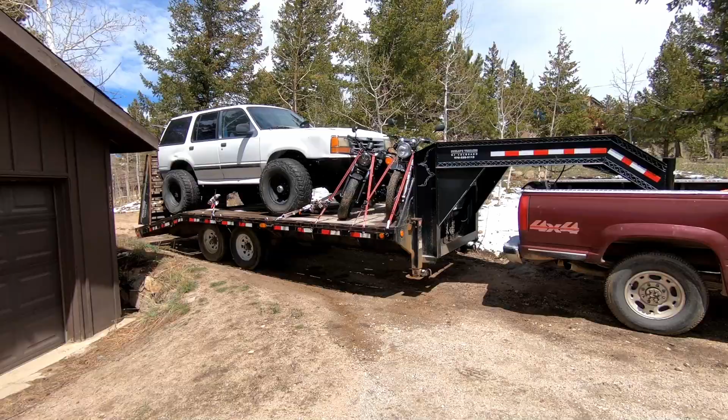All right, I'm estimating 13,000 pounds. Do we think we're gonna make it? It is all downhill, which should make it a little easier. Let's find out. We got lots of very hilly dirt roads to get where we're going. Slow speeds. Someone recommended that I kick it into 4 low for doing stuff like this. So I put it in 4 low and it's actually making a big difference. So thank you to whoever made that comment.

Has plenty of torque with that 2.5 times gear reduction and keeps the RPM up, so we're staying nice and cool. The 4 low trick made sure that this thing didn't overheat while I was towing all this stuff across town. And I even found a broken down F-250 on the side of the road pulling a trailer, and it gave me enough torque to even pull him to safety. So I was towing my trailer, an F-250, and that guy's trailer. Does that count as pulling triples?

The truck did its job and I got everything moved over, but I do need to be able to tow in 2 high and not just in 4 low, so I do need to actually fix this overheating problem. Also, it was a problem that just kept getting worse. Originally, it would only overheat when I was towing, but it started overheating even when I was just driving around town. Especially if I was going uphill with the AC on, this truck would overheat. I had 3 weeks before a 1,300-mile road trip, so I needed this thing fixed.

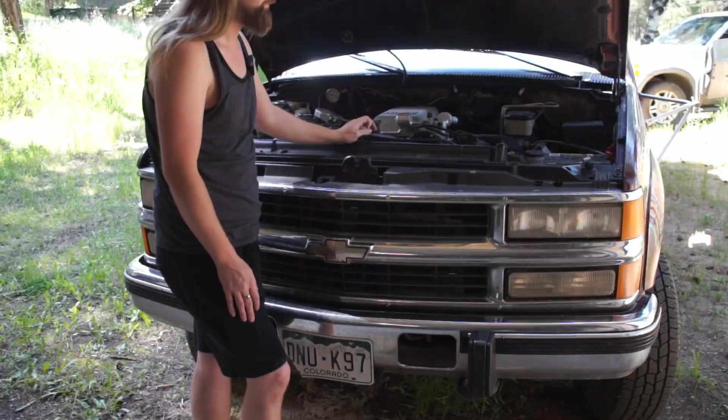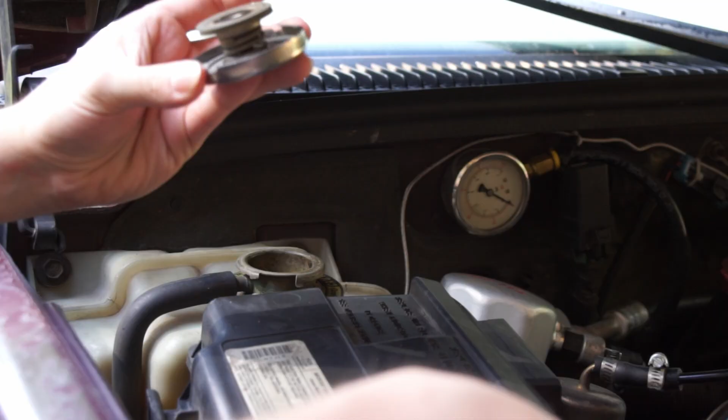The overheating on this thing's gotten so bad that I'm starting to get paranoid that it has a blown head gasket or something major. So first things first, let's check if there's oil in the coolant. I really don't know what I'm going to find down here. And if I find something bad, the whole course of this video is going to drastically change. I do have coolant inside of here. Looks relatively clean. Do not see any oily films on the top of it. It's a very good first sign, no oily film on the top. Now let's start it and see if there's any pressure coming out of the coolant system.

Nothing obvious so far. Doesn't want to blow that rag off. Doesn't want to blow my hand off. Let's turn it to high idle, see what that does.

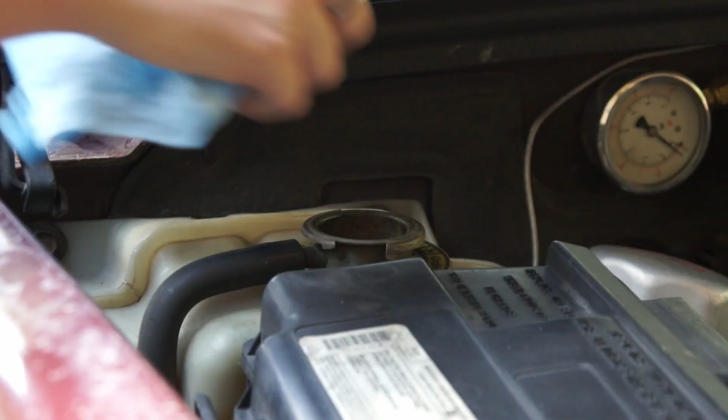All right, there were no obvious issues, no oil, no crazy blow-by. I'm gonna go through and inspect the cylinder heads, make sure there's no crazy leaks or anything, but as far as I'm concerned, that means there's probably not a head gasket issue. I can move on with what I was gonna do to this truck to fix the coolant issue.

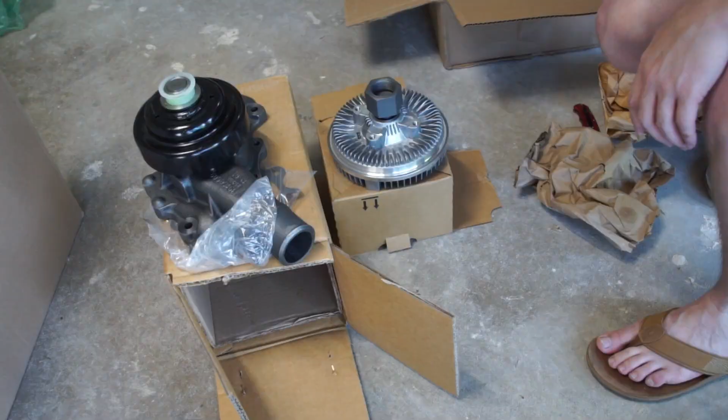All right, here's the parts I'm gonna use to fix this thing, and basically, none of these are for a 6.5 Detroit, which is the engine I have. Instead, most of these are for a Duramax. Duramax parts are a great upgrade for the 6.5 Detroits because GM's learned some stuff over the years as they continue to design these things. Sorry, just noticed I forgot to open the fan.

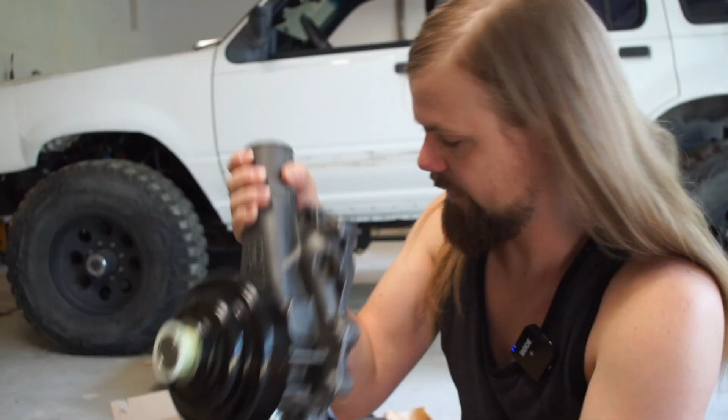The one part that's going to be controversial is this water pump here. The reason that this water pump is controversial is because it makes a whole lot more flow than the stock pump. There's lots of people on the internet that are gonna tell you that if you increase flow too much in a heat exchanger, that you're actually going to reduce your cooling capacity.

And those people are wrong. It doesn't work that way in a closed circuit cooling system like this. It's virtually impossible to have too much flow to hurt your cooling capacity. Almost always, until you get into cavitation issues or crazy flow dynamics like that, more flow is more better. I was thinking about going on a 15-minute rant about this and telling you all the engineering behind it, but you just need to know more flow is more better.

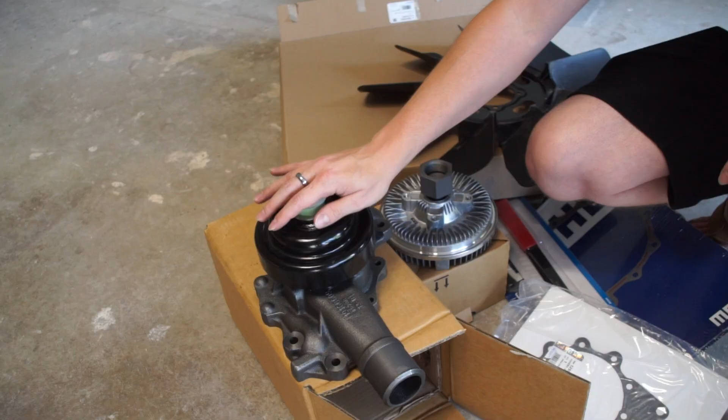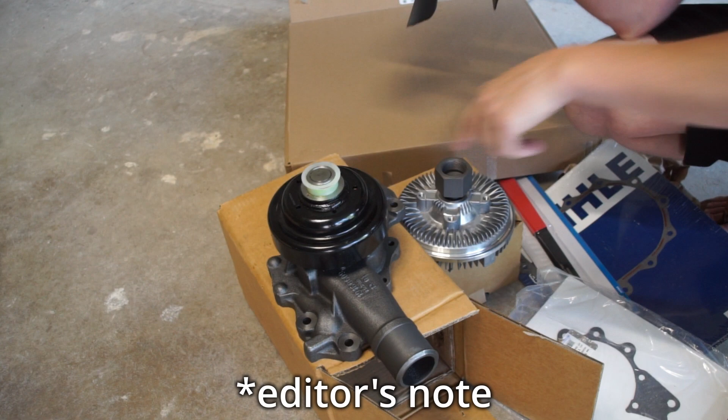So we got an upgraded pump that is better balanced, and it also provides more flow. We have a new fan clutch, and then we have a fan with more blades from a Duramax, because again, more flow is more better. That's true even for the air, not just for the coolant. Better for heat transfer, that is. It might be less efficient, might use more power, but it's better for heat transfer. These three upgraded components will not only replace outdated components on the truck that might be 20 years old and causing a problem, it'll also give me a lot more cooling capacity in general.

How am I gonna know that it's more cooling capacity? Well, it's gonna be really easy to test because the overheating issue is so bad on this thing that just driving up the steep grade to get home, if I don't take it steady at 15 miles an hour, this thing overheats every time. If I can go 25 or 30 on my way home in this thing when I'm done with this, I'm gonna consider it problem solved.

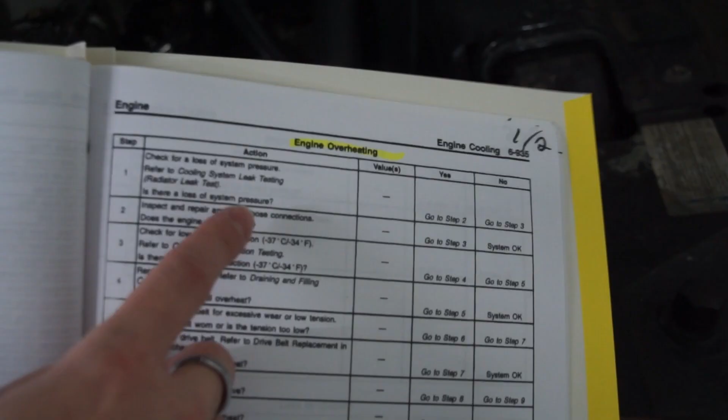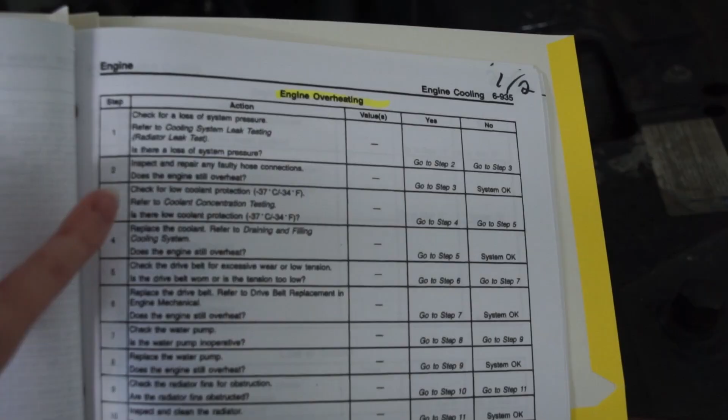All right, I'm always harping on this, but the first step when repairing anything is having good service info. Professional technicians don't repair anything without factory service info, and neither should you. Step one would be to come to the diagnostic tree that says engine overheating and go through all these steps. This will test easy things like make sure you actually have some glycol in your coolant, to test your thermostat and your water pump, and whatever's wrong with your overheating system, this will get you there.

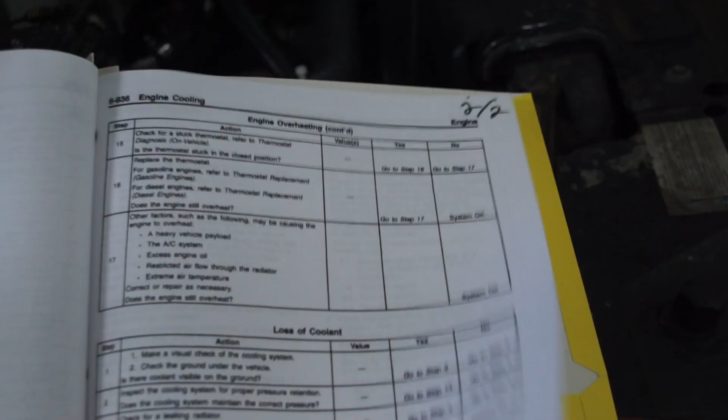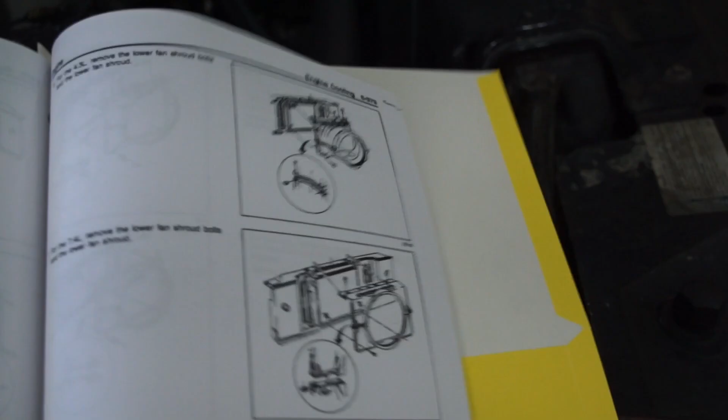And then not only that, it'll actually tell you how you're supposed to replace these things and give you a nice convenient little picture so you don't run into those situations where you forgot there was a fastener on the bottom and you forgot to undo it, or use the wrong sealant, or simple mistakes that mean that you have to do the job multiple times when you really shouldn't have had to. Always use factory service info.

That being said, I'm actually doing things completely backwards on this truck. I already bought all those upgraded Duramax parts way before the overheating issue got this bad. So I'm putting those parts in no matter what. Normally it's really expensive to just throw parts at a problem. You should actually have a solid diagnosis before you throw parts at things. But in this case, I wanted to upgrade the cooling system anyways, so I'm doing that either way. And as I take things apart, I will test them and make sure that what I'm replacing was actually the problem. Again, I'm doing it backwards, but we will go through the diagnostic tree as I pull this stuff apart. Do as I say, not as I do.

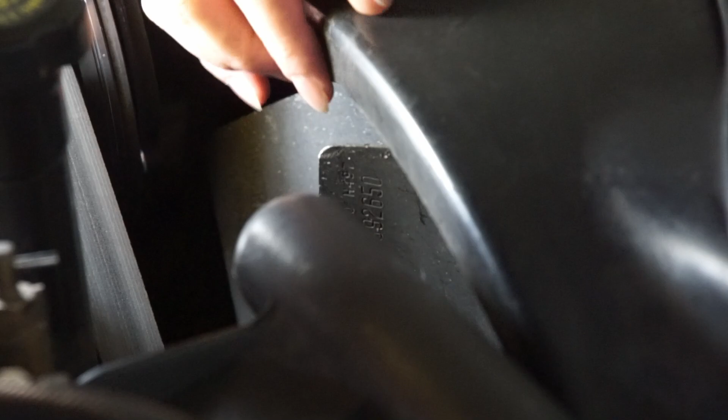In the spirit of actually diagnosing things, let's take a look at this fan. I already bought a fan clutch for this thing because I bought a Duramax fan and I need the fan clutch that goes along with it. But according to the factory service info, if I want to diagnose the fan clutch, one of the things I do is I spin this by hand, and if it goes 5 times around with no drag, then the fan clutch is bad.

Now, I don't know what no drag means. This is pretty loose, but I can certainly feel some drag. I'd say this passes, but unfortunately the service info isn't more specific, it just says no drag. There's a certain amount of wiggle that's allowed on this, and then the final test would be that you run the engine with the radiator blocked, and once the engine gets to a certain temperature, you should hear this fan clutch engage, and you use a thermometer to check and make sure that it engaged at the right temperature.

I'm not going to do any of that because I don't want to warm up the radiator before I pull it apart. That's just going to make it harder to work on, and I'm already going to replace the fan clutch. So again, do as I say, not as I do. I should go through all the diagnostic steps on this fan clutch before I replace it, but I'm not going to because I have an upgraded fan I'm putting on it either way, which means I need to put an upgraded fan clutch on. I'm going to start with removing the radiator.

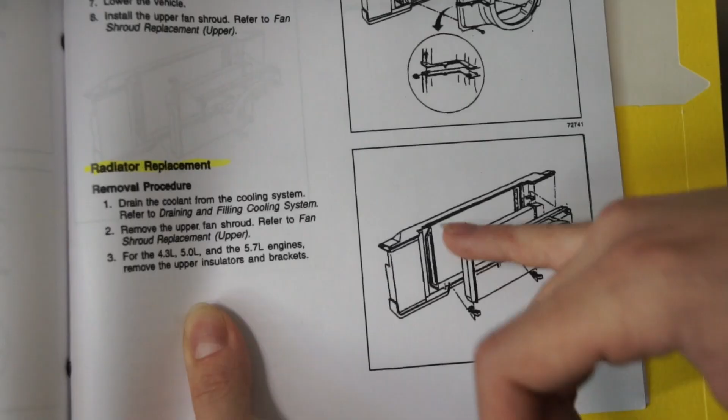I want to do this so I can clean out the radiator and also have easier access to the fan clutch and the water pump. So according to this, that means draining the coolant, removing the shrouds, pulling the radiator. Let's get to work.

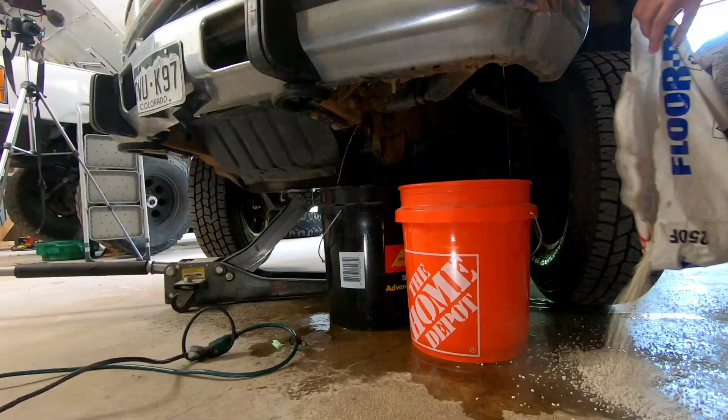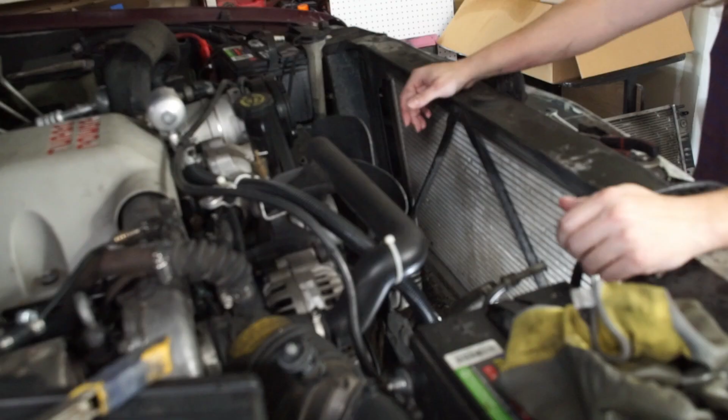All right, all the shrouds are out, radiator's out. I was gonna say that that was not the worst radiator removal I've ever done. It really wasn't that bad, except there was one hose clamp on the lower radiator hose that was just in an impossible location to access. I really should have taken the passenger wheel well out of this thing so that I could have reached that hose clamp. I fought with it like for an hour. It would have been faster just to pull the passenger wheel well, but I didn't, and so I ended up fighting with it for an hour.

I've started to hate working on V8 diesels because I feel like to get enough room to work on anything in this, I have to pull the wheel wells every single time. On an inline six, you don't have all your cylinder heads sticking out into your fenders, and so you can access stuff without having to pull the wheel wells. It's kind of a pain in the butt. Inline sixes are way easier to work on. Oh well. Got a V8 for now, this is what I've got. I'll stop complaining. Let's get back to work.

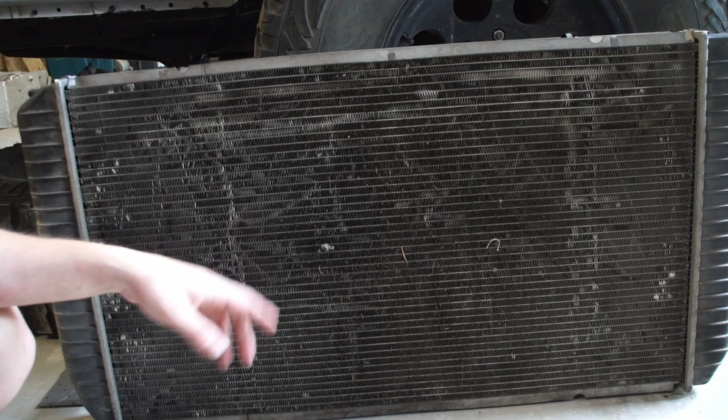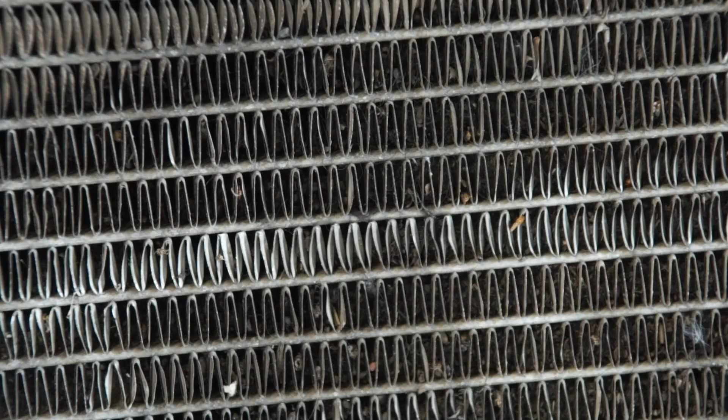From back here, this radiator doesn't look terrible, or at least in person it doesn't look that bad. On camera it actually looks worse than it does in person. But then when you zoom in, I'm not sure if it's gonna come across on camera, but there is like little tiny grit filling this thing all over the place. You probably can't tell, but I'm shining a light on the back of this, and most of the spots on the back, it's not even shining through. It's totally plugged. So let's rinse this radiator out. This might have been a big part of my problem.

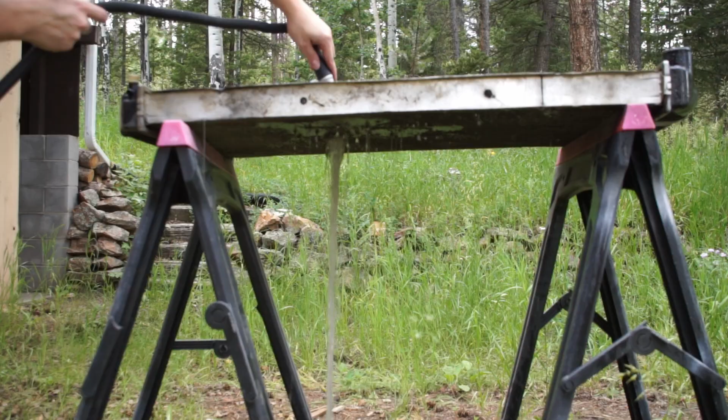See how brown that water is coming out? Mostly in the middle, the sides aren't so bad. Here's a look at what I mean when I say this radiator is plugged full of garbage. You see how between every single fin, there's just greasy, black, dirty nonsense? I don't know what all that is, but I'm having a really hard time just spraying it out. We'll see if I'm even able to get this thing clean.

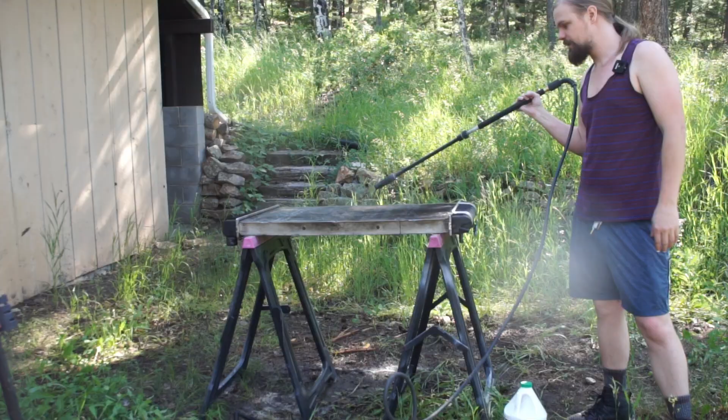All right, it's time to bring out the big guns. The hose is not doing it. I can't get all the crap out with the hose, so I'm bringing out the pressure washer. Normally you don't want to do this because you'll bend the fins if you use too much pressure and then it's screwed, but in the spirit of it's already screwed, I can't screw it any further, I'm gonna give this a try. If I can't get all this dirt out, I'm replacing this either way, so drastic times, drastic measures.

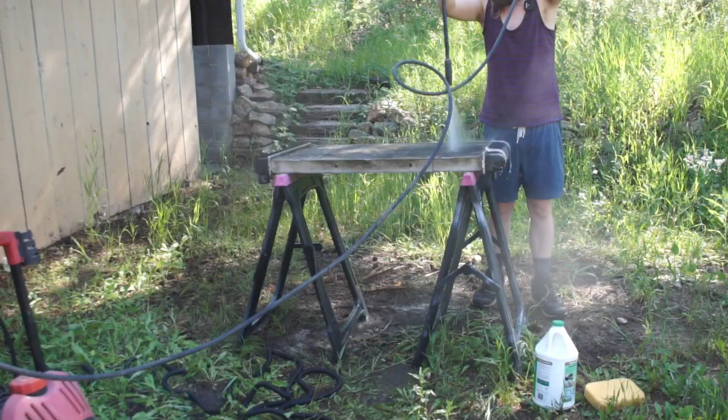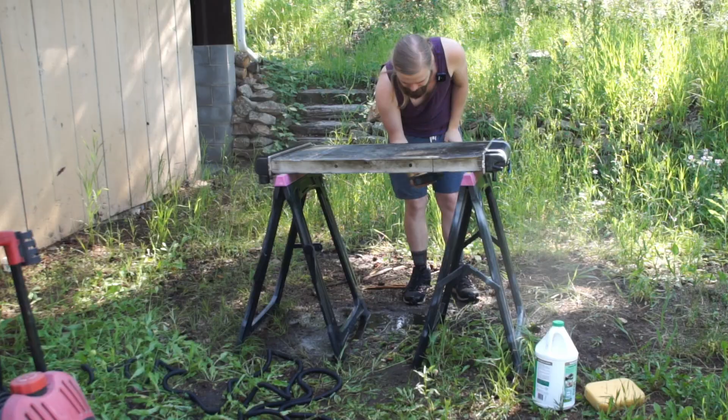Getting somewhere. It doesn't look like I'm bending fins yet, so let's keep trying that. So I'm pretty sure the radiator was my overheating problem because that thing was plugged full. On top of that, I was also having some issues with the AC, and if the radiator's plugged, no air can get through the AC condenser as well, so it all makes sense if the plugged radiator was my problem.

I think I got it clean enough that it'll work now, but if it doesn't work, I'll just have to buy a new radiator and replace it. For now, I'm hoping I got away without spending the money on that.

It's time to move on to doing the fan clutch and the water pump. These are the parts that are going to be upgraded to heavy-duty parts, so they should be better than stock. Between fixing the maintenance problem with the stock component and upgrading the other stock components with better aftermarket parts, hopefully I got this problem fixed. We'll see. Let's get back to work.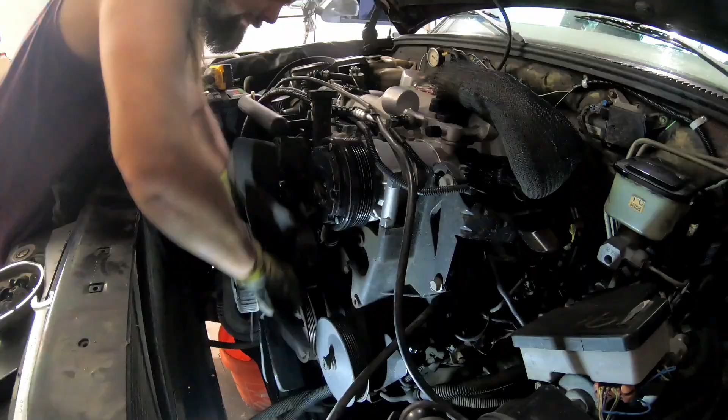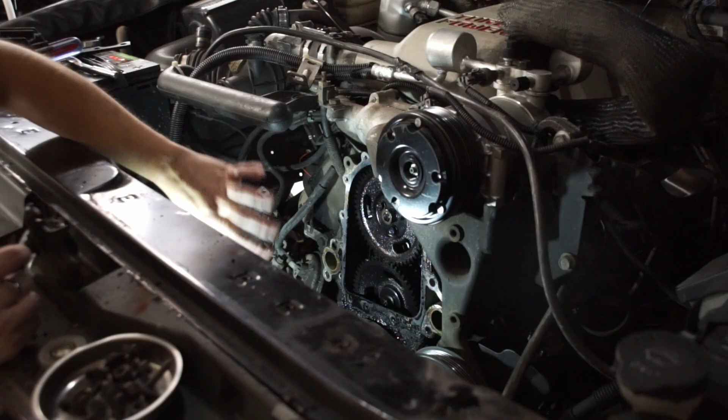There's the water pump off, and I actually had to remove quite a lot of stuff to get this to work. Basically, all of the accessories on this side had to go in order to get to this. One thing I noticed is it is very, very wet underneath this cover here. This was definitely leaking. So I don't know if that's an indication that the water pump was bad or if it was just the gasket behind it, but either way, there was service back here that was needed.

Hey, from here I can tell I got some leaky valve covers over there. Probably gonna ignore that problem.

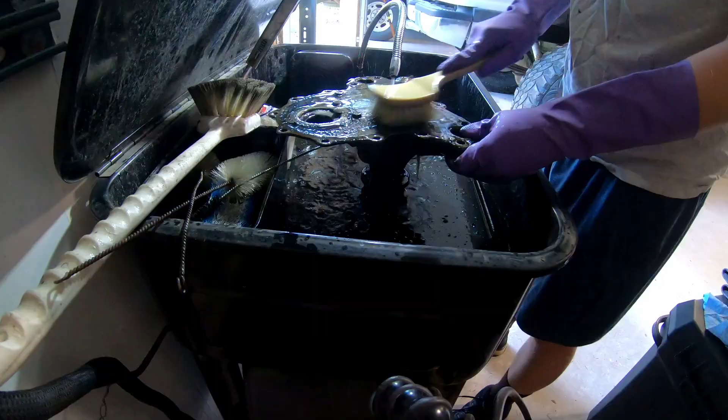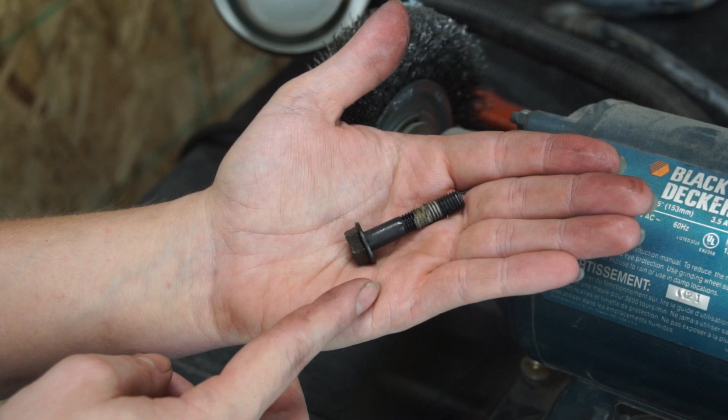So I've been cleaning up each of these water pump bolts, been running them through the parts cleaner, and then I've been scrubbing them off as best I can. Some might say this is pretty anal, but thread lock and sealants do not stick to dirty bolts. On top of that, dirty bolts have different torque specs than clean bolts.

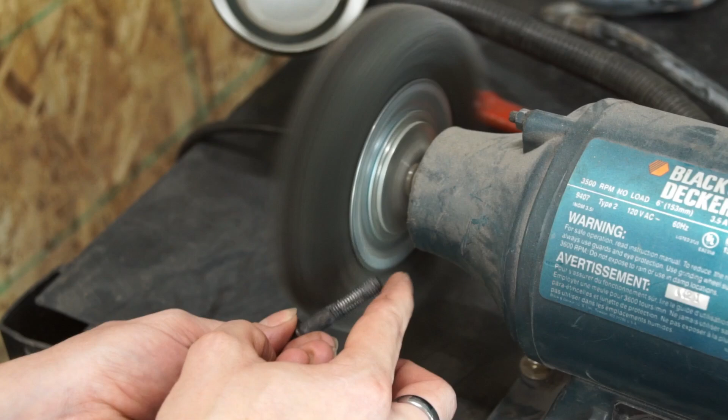So if you're putting something together that involves gasketed surfaces, and you don't want to have to get back in and redo that job because your torque spec was off or because it's leaking because your torque spec was off, it's a really good idea to clean up your bolts. It's a really easy thing to get wrong, and it's a really stupid reason to have to redo a job, so clean off your bolts. It'd be really nice to have an ultrasonic cleaner to do this for me.

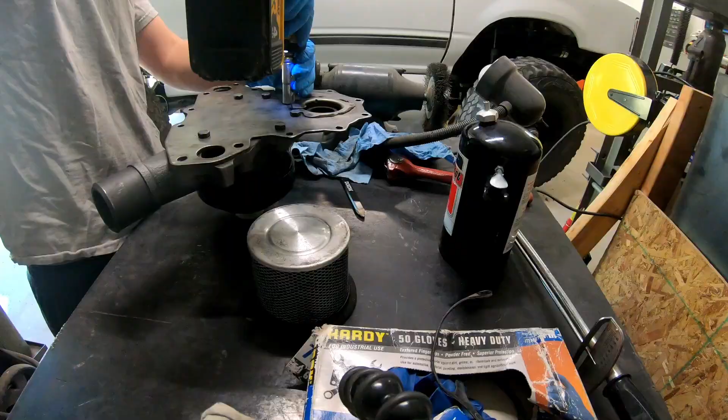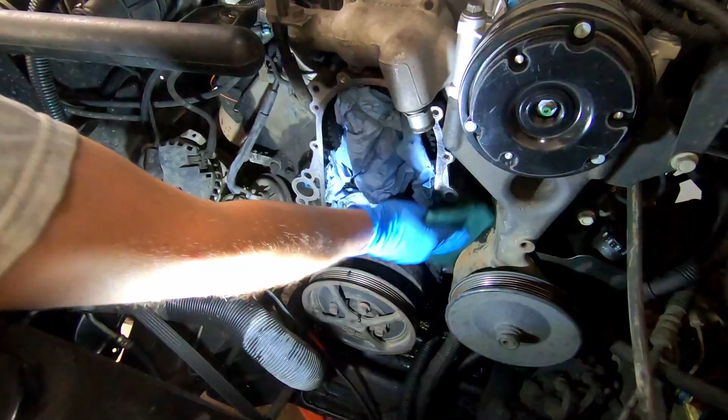All right, I got the water pump back on. It's on there and that's torqued. There's still a lot of stuff I need to reassemble to this engine, and one of the most annoying things in the world to me is you start assembling things, realize you forgot to put something on, and then you have to go back and remove all the stuff you just put on in order to put back on the thing you forgot. So I'm gonna show you a little trick to get away from that.

In safety critical industries, when they're working to procedure, one of the things that the operators do is what's called a circle slash technique. What you do is the step that you're on, you circle. That's how you know what step you're on. You work the step, and once that step's complete, you add a slash, and then you circle the next step that you've started. This tells you, have I started this step? If there's a circle, I have. Have I finished that step? If there's a slash, I have.

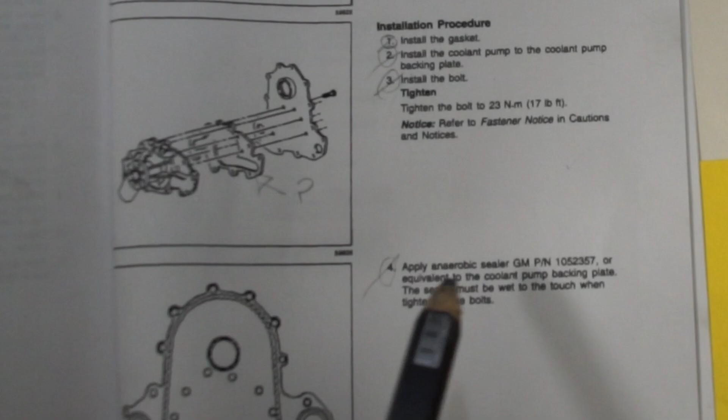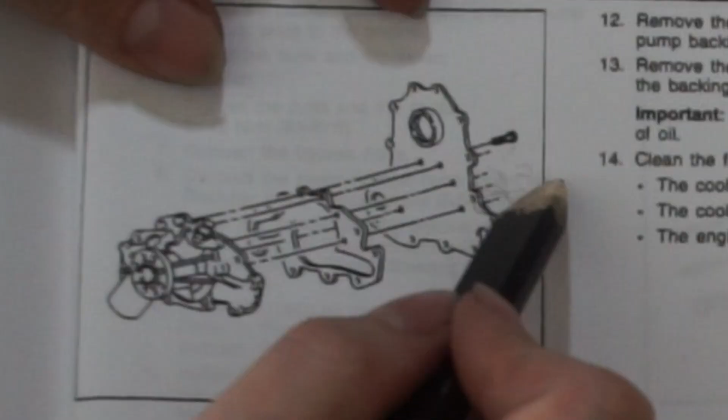It makes it really hard to miss things because it'd be very obvious. I look back over this sheet and I see all the parts of the installation procedure I clearly did because I circled and slashed them, including the tighten steps. You could take this even a step further and circle slash your fasteners or add your torque spec number on the fastener as you go, but I'm not gonna get that anal with it.

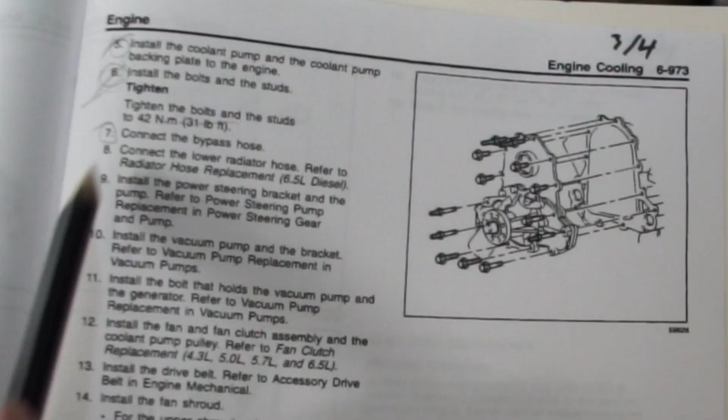This might seem like a lot of work, but slow is steady and steady's fast. So it's better to take your time with this stuff. If you skip something, it'll take you twice as long to go back and redo it than it would have to just be anal about your steps in the first place. Back to work. Got a bunch of hoses and things to connect.

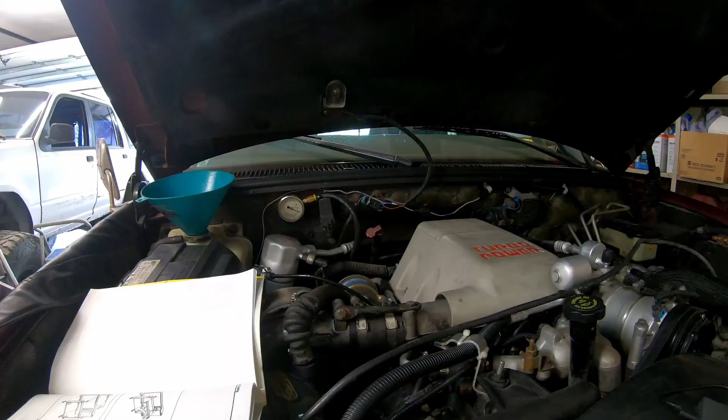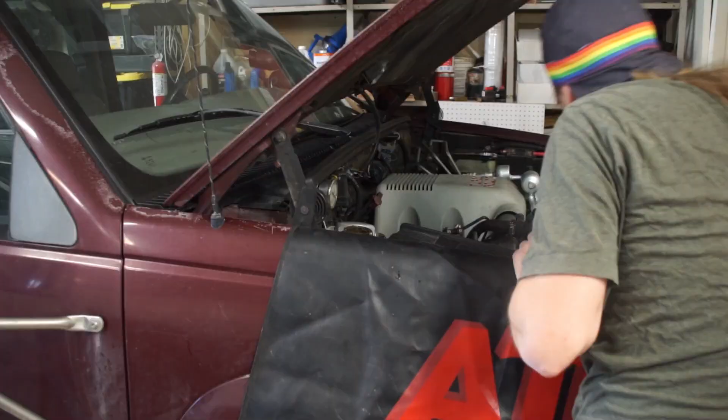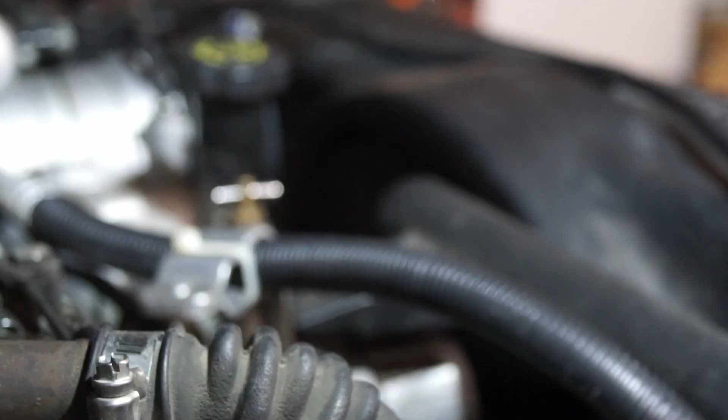It's running great. I'm waiting for it to warm up so the thermostat will open and then I can check the coolant level. It doesn't seem like the fan is running into the shroud anywhere, which is really good news. I haven't seen any leaks anywhere yet. Let's get this thing bled and see if we managed to fix this.

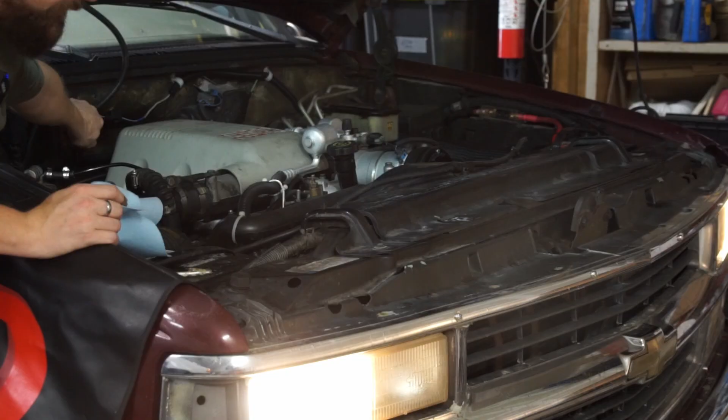The last thing I need to do is refill the transmission fluid. The radiator has a transmission cooler in it, so I lost a decent amount of tranny fluid when I did the radiator.

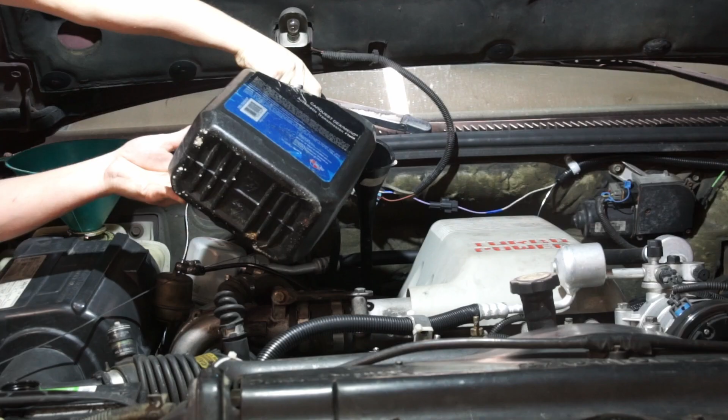Really, I should probably do a full flush, but I'm not gonna. All right, everything seems to be working, which is great news. You never know when you do a big job like that if there's gonna be some stupid thing you missed. Following service procedures helps with that, but you still never know. I don't see any leaks. I don't see any issues.

So far it's not rubbing on the fan shroud, but time will tell. I'm gonna have to drive it around a little bit and check the fan shroud, make sure it wasn't rubbing, check the trans fluid, make sure it's topped off, check the coolant, all the normal good stuff. There is still one issue with this I wanna fix though. It's a pretty serious issue actually, but I'm hoping the fix will be simple.

What I have you staring at right now is where the steering shaft enters the steering gearbox, and the gearbox isn't moving and neither are the tires. That is how much I can move that shaft without moving the tires whatsoever. This is how much the steering wheel moves before it moves the tires, which means the whole time I'm driving down the road, it's like a Mickey Mouse cartoon. This thing's wiggling back and forth like that. There's a lot of slop in the steering gearbox.

Now, personally, every single car I've ever driven was a jalopy that had clapped out power steering, and I've never driven a Chevy with tight steering. So I didn't even notice this at first until my partner drove it, and then she went, "This is dangerous, you need to fix this." And then I drove it a little more and I went, yeah, you're right. This is crazy. I better fix this. So I'm really hoping that just adjusting the lash on the steering gearbox is going to take the slop out, but that might be a lot to ask. Let's see if adjusting the gear lash fixes this or not.

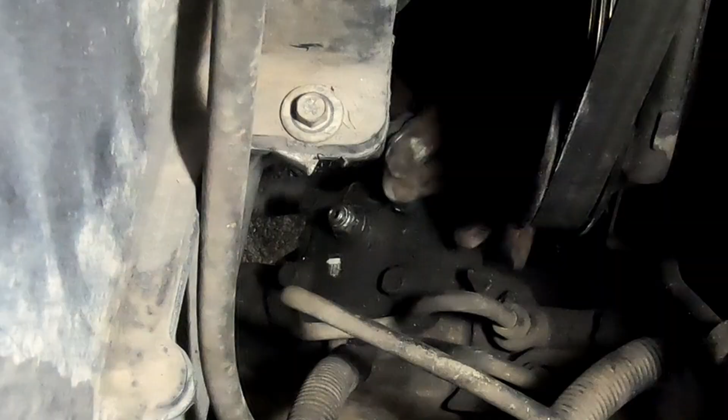All right. That is much tighter steering. I can actually feel it pushing back. Everywhere I try and move it, I can feel the tires pushing back. And when the truck's running, which it's not right now because I want you to be able to hear me, these little movements are creating movements in the tires. So I think I nipped this problem in the bud. Hopefully tightening a little screw on my steering gear will prevent an accident.

So that was a really easy fix. I won't know for sure until I drive this, and I need to drive it to test the cooling system anyways, so I think it's about time for a test drive.

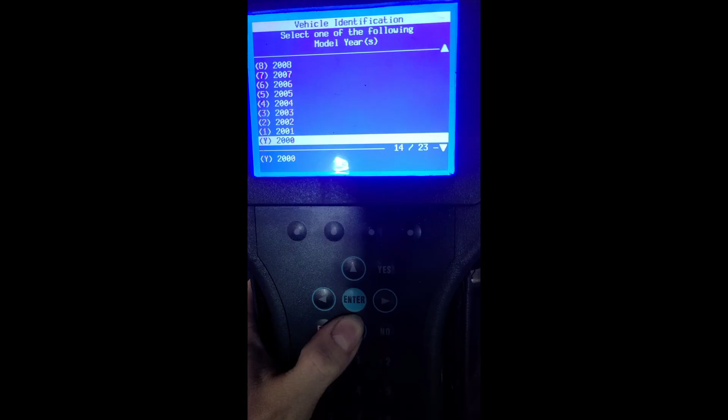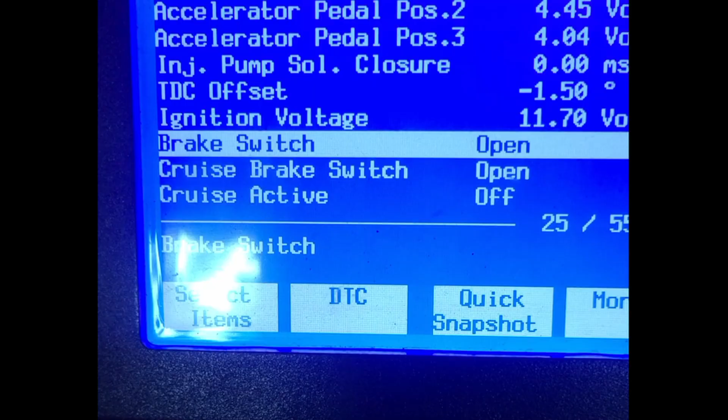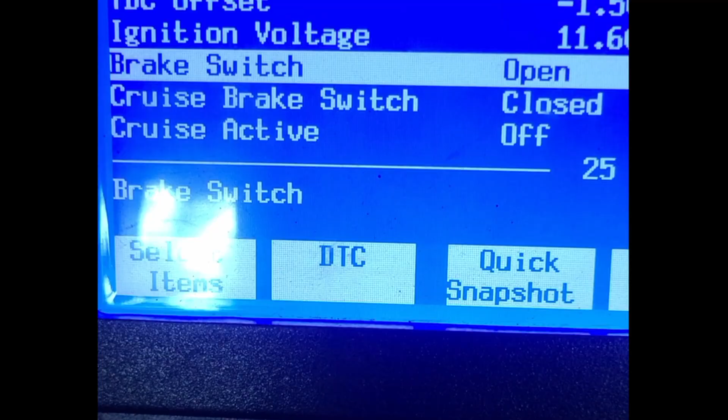So my partner told me that the brake lights on this truck weren't working when she was driving behind me, but luckily I have this factory scan tool. Okay, it has a monitor for the brake switch. So my foot's off the brake and it says open. Foot's on the brake and it says open. Cruise brake switch. So it has 2 brake switches? Yeah, that brake switch is not responding. All right. I think that's problem verified without even having to pull this thing off, which is really nice. It is definitely the brake switch that's the problem because I don't see that cycling on and off. That was easy to diagnose.

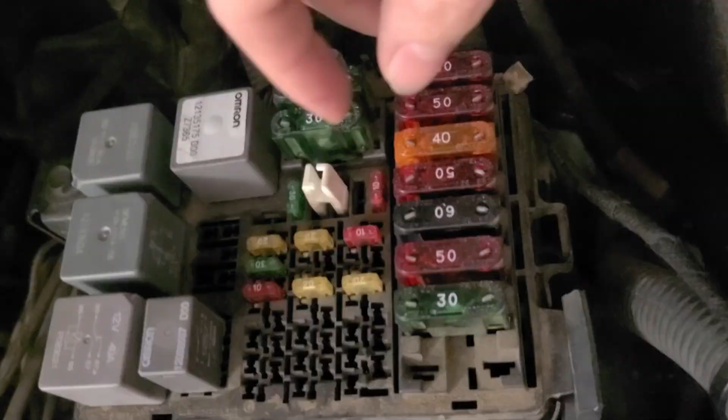Also, just in case anybody's panicking in the comments, I am going to actually check the fuse before I just declare the brake switch dead. This is the stop hazard. Damn it. And it was not blown, I promise. I already looked at it. So it is the brake stop switch that's the problem, most likely, or a wire in between. Let's start with the brake switch.

This is the brake stop switch out of the truck. This is pretty simple. It's basically just got this little button here that gets pushed when you push your brake pedal, and then that has little tangs that pull these metal contacts apart. So this is a very simple component. It's unlikely that there's actually anything wrong with this. I don't see any broken bits of plastic or anything.

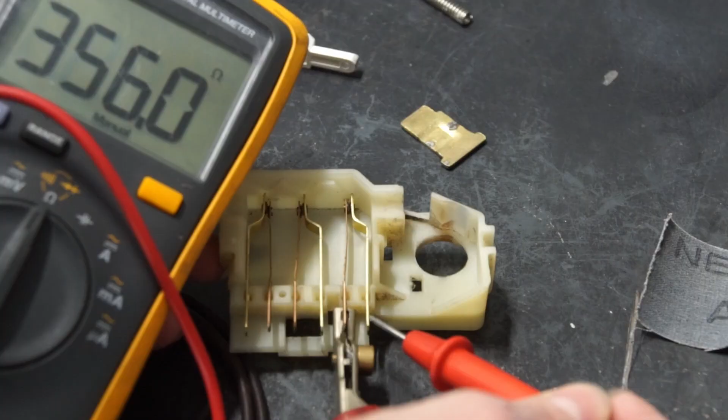But if you look at these 2 contacts right now, these are clearly touching. But when I put my meter between them, I'm either getting out of limit or I'm getting like 300 ohms of resistance. Even though these 2 contacts are touching, there's a lot of resistance between them. So what I'm going to do is I'm going to come in here and clean up all these contacts. I'm just going to use a bit of emery cloth and electronics cleaner.

I'm tempted to use brake clean, but I'm worried it'll harm this plastic, so I'll try and see if I can find some isopropyl or something. Let's see if cleaning up these contacts actually fixes our problem. Electromechanical stuff like this is kind of nice because you have springs and contacts and levers that hopefully just scuffing these up will fix it. Let's see.

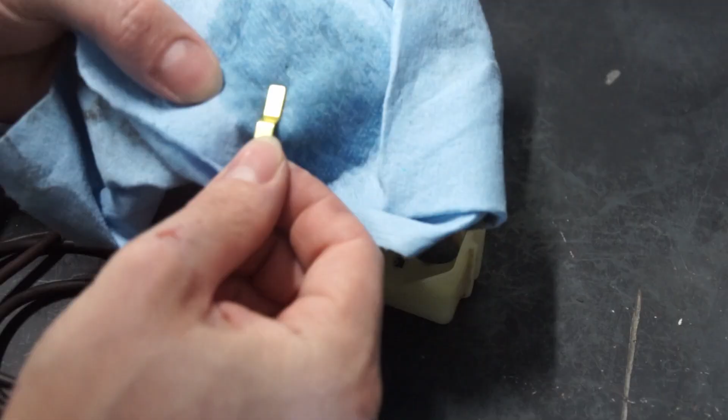All right, that is a very clean contact. Let's put this back together. And there we go. We're getting basically 0 ohms. Cool. Let's clean up the contacts on all of this and see if that fixes it. It'd be really nice if it was a free solution. Remember, a lot of stuff can be fixed. It doesn't just need replaced. Hopefully I don't eat those words.

All right, I got this thing back together. There's 3 positions in this. The first one, as you can see, is normally open. Nothing on that meter. The second one should be normally closed. Yep, 0 ohms. And then the third one is also normally closed.

0 ohms. So now if I put a screwdriver in here, I can close the switch and then see what the switched position is. This first one should be closed. Yep, 0 ohms. The second one should be open. Overload, out of limit, open. And then the third one should be open as well. Perfect. So that is this switch fixed.

Time to plug this back in, see if it actually fixed my stoplight issue. I'm really glad I didn't buy a new one of these. It was really easy to just take this apart and clean it. And it taught me a lot more about how this works and what the computer is actually seeing in the switch.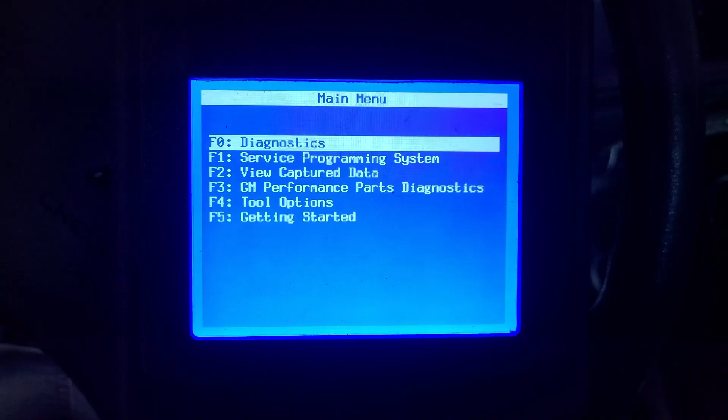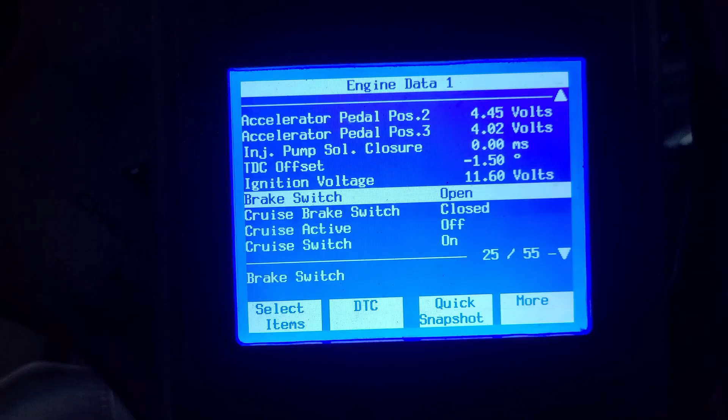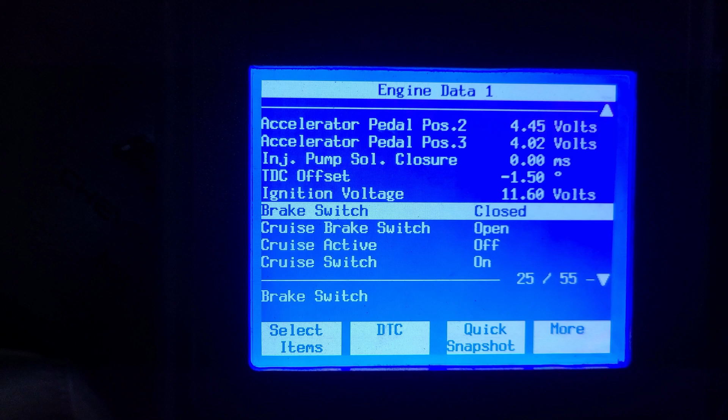All right, here we are again, back in the car with the GM Tech 2. Let's see if the car sees the brake switch now. All right, brake switch open, cruise brake switch closed. Let's push the pedal. Closed. Oh my God, we've done it.

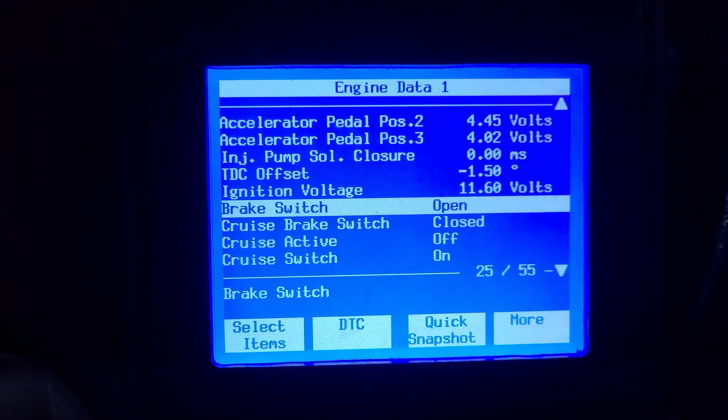All right, I can't be up here to push the pedal and be in the back to see if the brake lights are working at the same time, so let me set up a camera and YouTube, you tell me if it's actually turning the lights on or not. Ignore the beat up tailgate. I'll get to fixing that eventually. Brake pedal pushed. Brake pedal off. On, off. On, off. Please tell me that that worked.

I checked the video and we do have brake lights. That's amazing. I didn't even know that was a problem until my partner was following me and told me I didn't have any brake lights, but that's a big safety hazard and glad I was able to fix that.

Now that I actually have brake lights, let's go for a real test drive. I need to find the biggest hill I can and drive up it as quick as I can to make sure that the cooling system is finally working. So let's go do that.

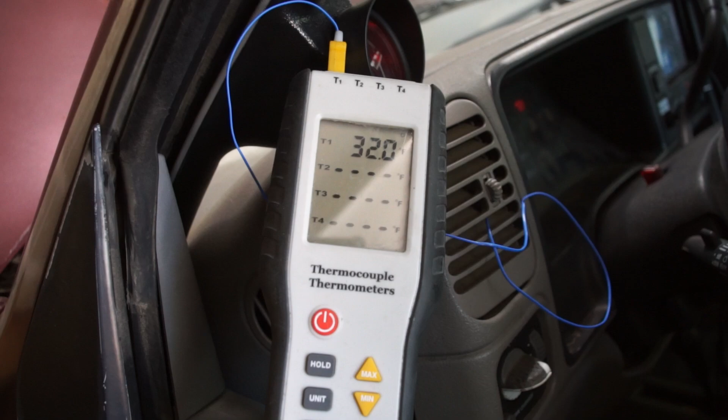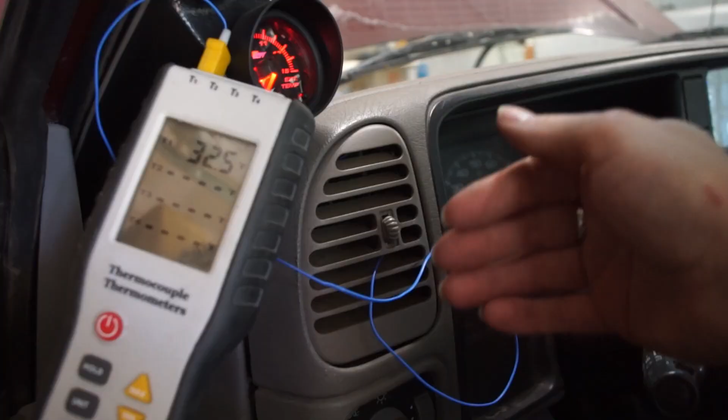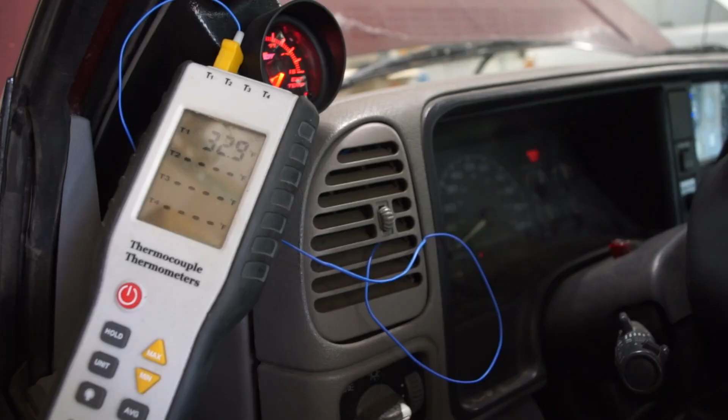I figured I'd check the AC while I was at it now that I can actually get some air across the condenser. And this is icy cold. Look at that, I was getting like 32 to 33 degrees Fahrenheit coming out of the vent. That is the coldest that this has ever blown. And that's like the coldest I've ever seen out of an R134 system. Those are like R12 numbers. That's amazing. Turns out actually getting air across the system helps. That's gonna really help on these long road trips.

All right, this is the hill we're facing. Steepest hill I could find. It's more than a 15% grade, I don't know exactly what it is. Usually only take this about 15 miles an hour, but AC's on, I'm gonna try for 20 to 25. Let's see if this thing overheats. If it doesn't overheat, cooling system's fixed.

If it overheats, his wife will be mad.

This is a world of a difference. EGTs at a solid 900 to 1,000 for 7 minutes straight, and the gauge is not going over 215. The second it starts to move, I hear the fan kick in and then it cools it back off immediately. This is a world of a difference. Makes me feel like I have a lot more power too, because I don't have to sit there watching the EGTs the whole time, waiting for it to overheat on me.

Absolutely night and day. I've left the AC on this entire time, kept the hammer down, haven't had to turn on the heat once to get this thing to cool off, haven't had to pull over for overheating once. Night and day. Not sure if it's the upgraded parts as much as it is actually removing the giant plug out of the... leaving some smoke on this one. I should have downshifted there, but I'm holding a phone.

I don't know if it's removing the plugged garbage out of the radiator or if it's the new parts. It's probably the first thing more than the second, but either way, night and day. I'm gonna set you down so I can downshift. I don't want to be too dramatic here, but I went from babying the throttle because it would overheat if I went anywhere near the throttle, to now I don't think I could overheat it if I tried. And I am trying, and it's not overheating. So this is a world of a difference. Truck fixed.

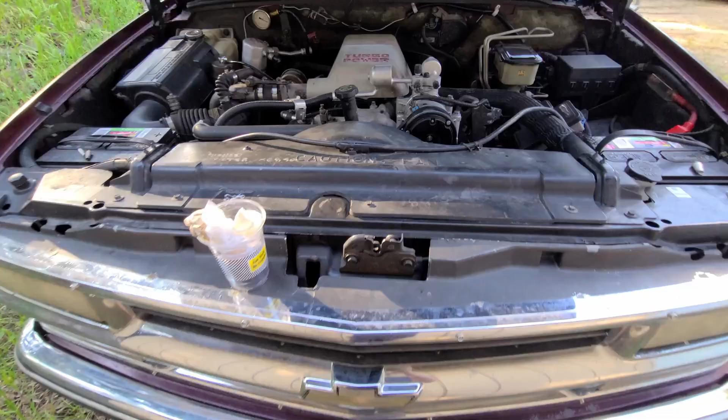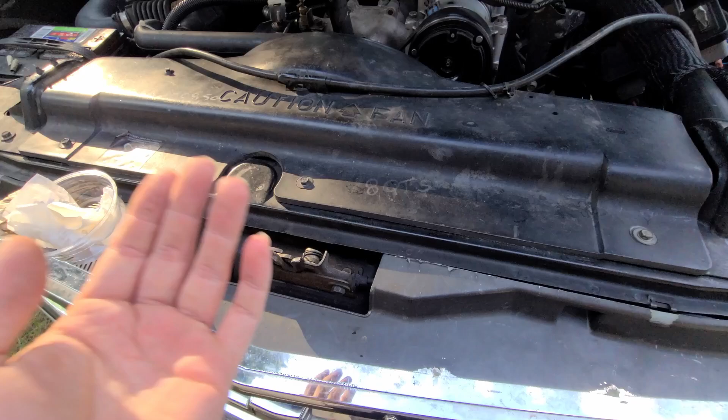Don't worry, nothing broke. I got done with that drive and I figured I'd pop the hood and make sure the fan wasn't heating and all of that kind of good thing. And one thing I just noticed with this new cooling system upgrade is it used to be when I put my hand here in order to pop the hood, it was so hot it would practically burn me. And this time the handle itself was cool to the touch. It doesn't get hot until way back here.

All of this is cool and then this is hot, which is a really good sign because it means that we're actually cooling. I think the reason all this was so hot before was because the radiator was plugged, so all the heat was radiating up here. I think this is a really good sign that the heat's not just getting trapped here. I'm actually able to suck it through like the cooling system's supposed to work. All in all, huge, huge upgrade. This is night and day.

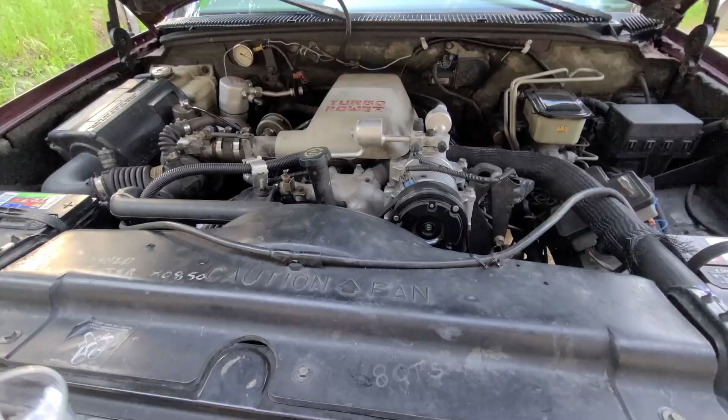My partner and I are taking a road trip on this thing in like 3 days and everything else is working great, so there's time for one final mod. If you look at the windows on this thing, they are entirely see-through. There is no tint on them whatsoever. When here on Earth you get 1,000 watts per meter squared of solar power coming in, it's really hot to drive that thing. I've literally gotten sunburns on my left arm while driving because of all the heat coming in the window. Makes it really uncomfortable to drive through hot climates, makes it really hot in the cab, and we're gonna fix this by tinting the windows.

Here's the one rear one we already did. So this is the rear, which is 5%, only allows 5% of visible light through. That'll keep it nice and cool back here, which will be great because we also installed a platform for the dog to sleep, and the dog's a double coat shepherd, really sensitive to hot weather, so it'll keep her nice and cool. It'll also give me a place to sleep on long road trips if I ever need to do that. 5% tint on the back that we're working on, and then we'll add some 35% tint on the front 2 windows, which is the maximum that's allowed in my state. And that should make this cab way comfier to drive.

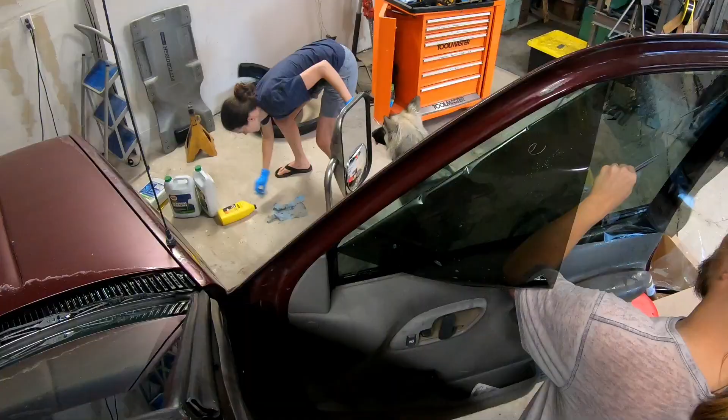It is nice and dark back here, and I think it's puppy approved. This will be so much nicer for road trips for the puppy to have this platform to lay on. Dark windows, won't be nearly as hot in here. This will be fantastic. And if I ever have to sleep in the back of here because we're on a long road trip or something, this will add a lot of privacy and be a lot more comfortable. All right, I said I didn't do this for looks, but that actually looks amazing. Really makes the truck look a lot better. So it'll be a lot more comfortable and look a lot better.

I mean, I'm not saying it's perfect. There's a reason that shops charge as much money to do this as they do, and it's to make it look perfect. But for the purposes of keeping the 1 or 2 horsepower worth of heating off of us that the sun can beam through these windows, this is awesome. One thing I would note if you're doing this, keep your razor blades sharp, replace them often. The places it turned out the worst are the places where my razor blades started ripping instead of cutting the tint. So keep your razor blades sharp.

On the road, the truck made it all the way to Buc-ee's, the obligatory stop during a road trip, and we can buy like a $30 lunch. So we made it pretty far. All right. The Buc-ee's rating is that the food's pretty decent. Probably go back, but it's super overhyped. It's kind of cool, I guess.